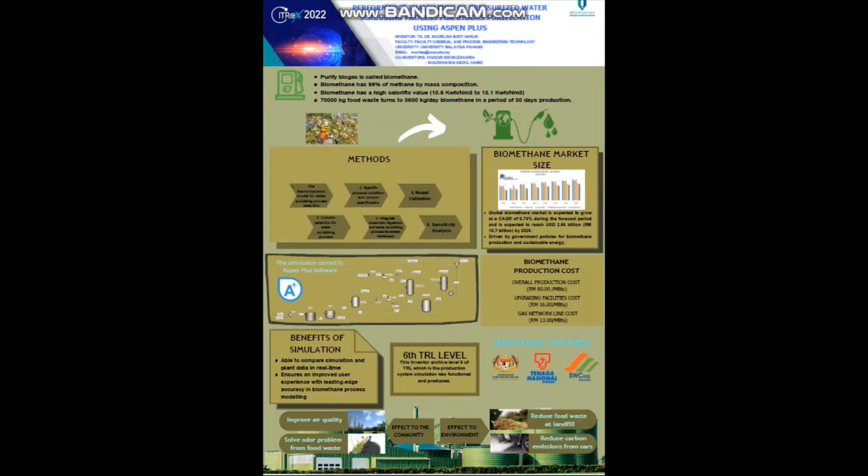Our research title is Performance Evaluation of Pressurized Water Scrubbing Process for Biogas Purification using Aspen Plus software. Our inventor is TS Dr. Noorlisa binti Harun, and I, Kaidi bin Zakaria, and my friend Syazwan bin Abdul Hamid, are co-inventors in our team. We'll continue our presentation by presenting our research on Performance Evaluation of Pressurized Water Scrubbing Process for Biogas Purification using Aspen Plus.

For the introduction, biomethane is biogas in which carbon dioxide, hydrogen sulfide, and water have been removed. Biogas is a renewable energy source that can be used to substitute fossil fuel in power and heat generation. Biogas is produced by anaerobic digestion, a process by which organic matter such as animal or food waste is broken down to produce biogas. Biogas needs to be cleaned first before being used for fuel, heat, and electricity.

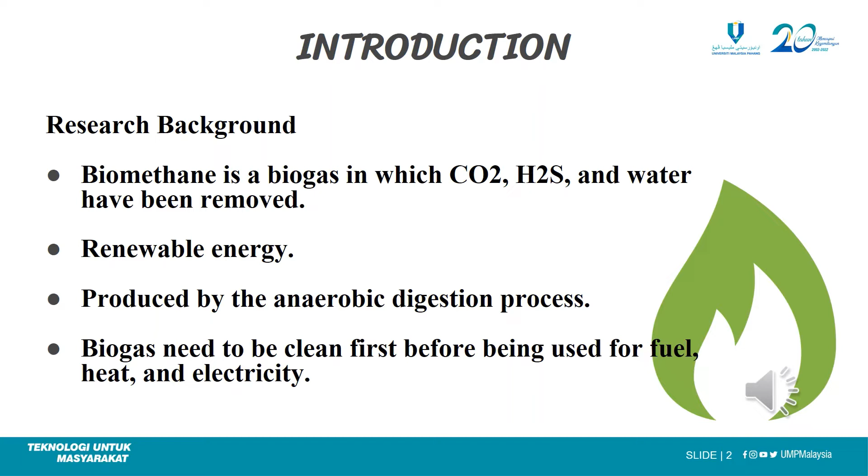There are several processes to purify biogas such as pressurized water scrubbing, pressure swing adsorption, physical absorption, chemical absorption, membrane separation, and cryogenic separation. According to the figure, water scrubbing is the most common process used to purify biogas. This is because it is easy, low cost, and has low toxicity compared to other processes.

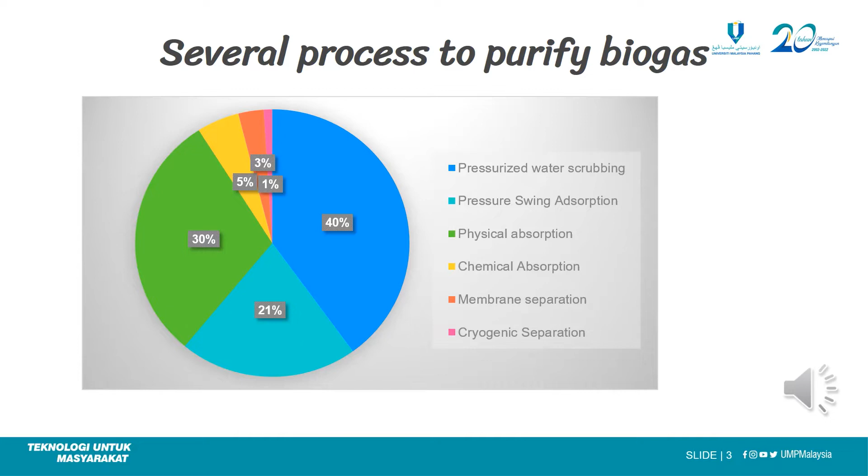For the problem statement, the main problem is high water demand. This is because water is recycled continuously, so evaporated water must be replaced. In order to increase the absorption ability in the column, high water demand is required.

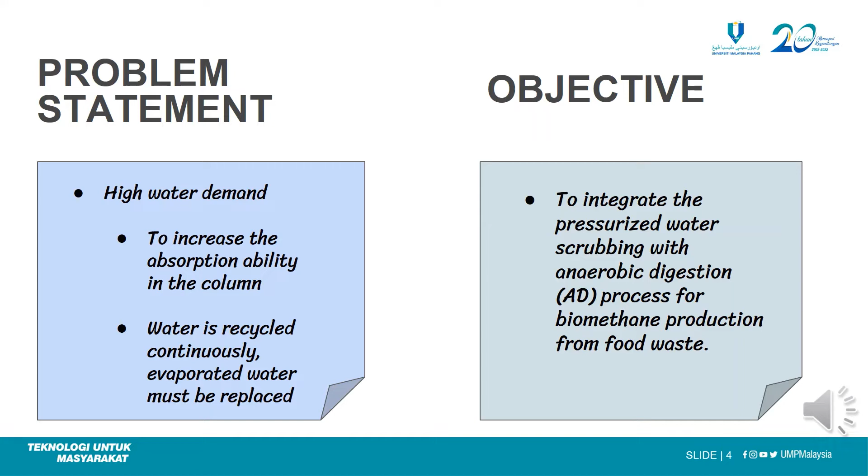The main objective is to integrate the pressurized water scrubbing with anaerobic digestion process for biomethane production from food waste. For the scope of study, firstly, model development of pressurized water scrubbing for biomethane production using Aspen Plus software.

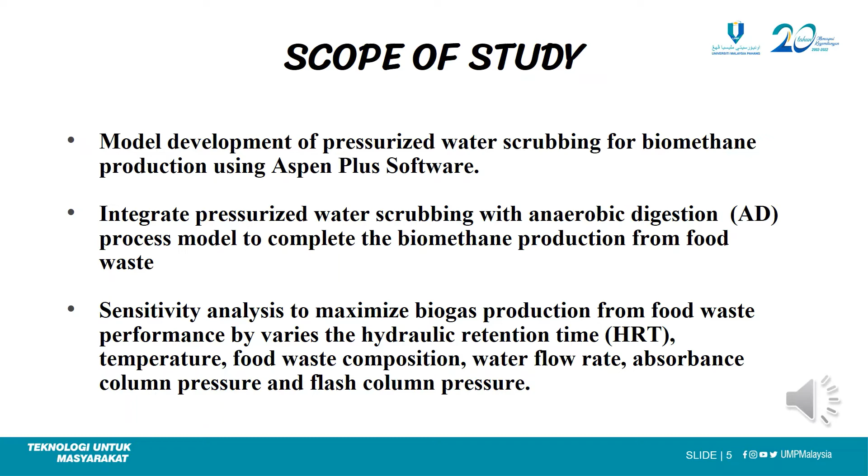Second, integrate pressurized water scrubbing with anaerobic digestion process to complete the biomethane production from food waste. Third, perform a sensitivity analysis to maximize biogas production from food waste by varying the hydraulic retention time, temperature, food waste composition, water flow rate, absorber column pressure, and flash column pressure.

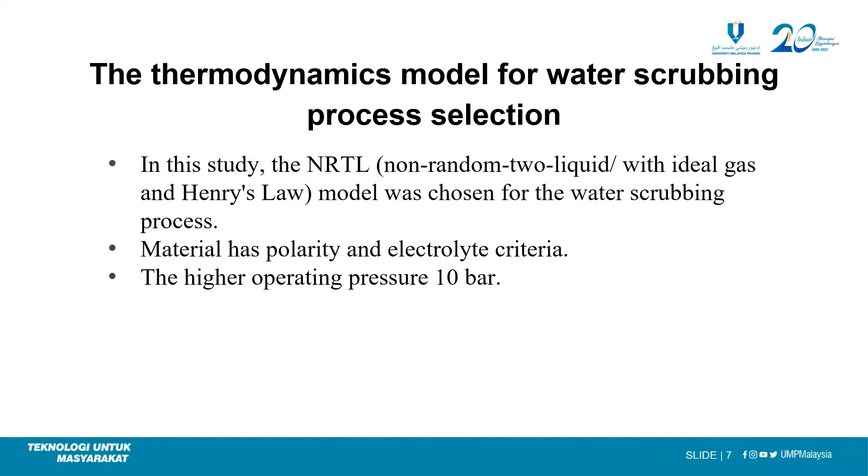I will present our study methodology. First, the thermodynamic model for water scrubbing process selection. In this study, the NRTL, non-random two liquid, with ideal gas and Henry's Law model was chosen for the water scrubbing process. Next, column selection for the water scrubbing process: RadFrac without reboiler and condenser was selected as the absorber column.

RadFrac with reboiler was selected as the stripper column, and Flash was selected as the flash column.

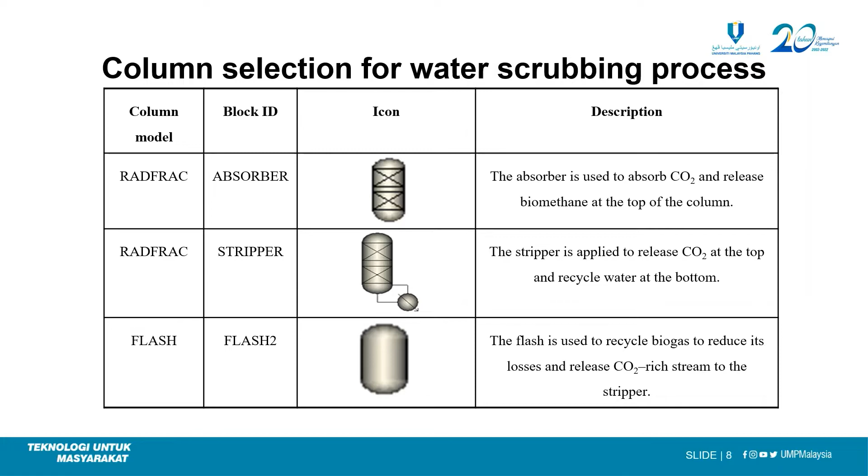Next, specific process conditions and column specifications. For the calculation type, rate-based calculation was used for the absorber, whereas equilibrium calculation type was used for the stripper. The absorber column has 18 stages, whereas the stripper has 7 stages.

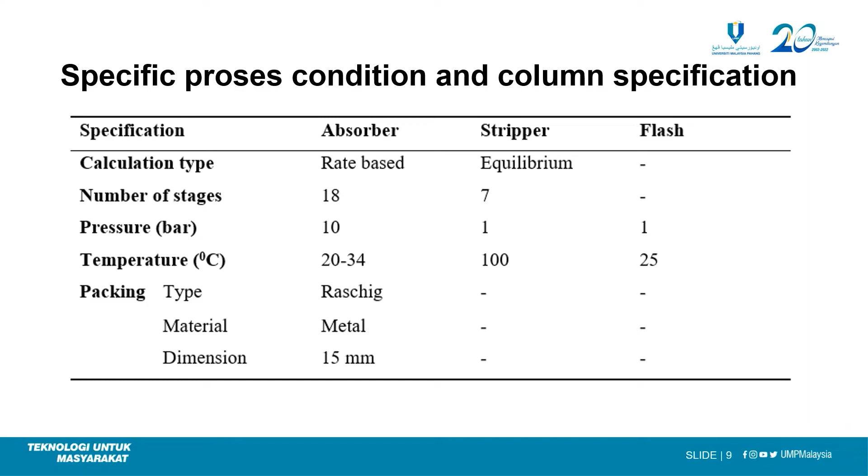The absorber column will operate at 10 bar pressure and 20 to 34 degrees Celsius. The stripper column will operate at 1 bar and 100 degrees Celsius, and the flash column will operate at 1 bar and 25 degrees Celsius. In the absorber column, the stages will be filled with metal Raschig packing with a dimension of 15 mm.

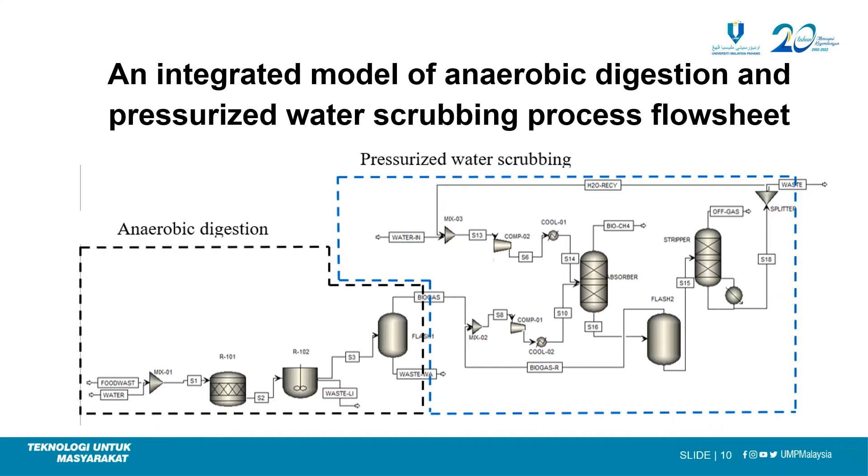Next, an integrated model of anaerobic digestion and pressurized water scrubbing process flowsheet. This is the anaerobic digestion region and this is the pressurized water scrubbing region. Process description for the integrated flowsheet.

First, the food waste and water will enter the process at a ratio of 10 to 1. The food waste and water mix in the stoichiometric reactor to undergo hydrolysis, then continue degradation reaction in the CSTR to produce biogas. Biogas from the CSTR enters Flash 1 to remove some water.

After some water was removed from the biogas, the biogas entered the purification process. The biogas went to the absorber under a pressure of 10 bar. Pressurized water was used in the absorber to dissolve CO2 from the biogas. Biomethane will come out at the top of the absorber as product.

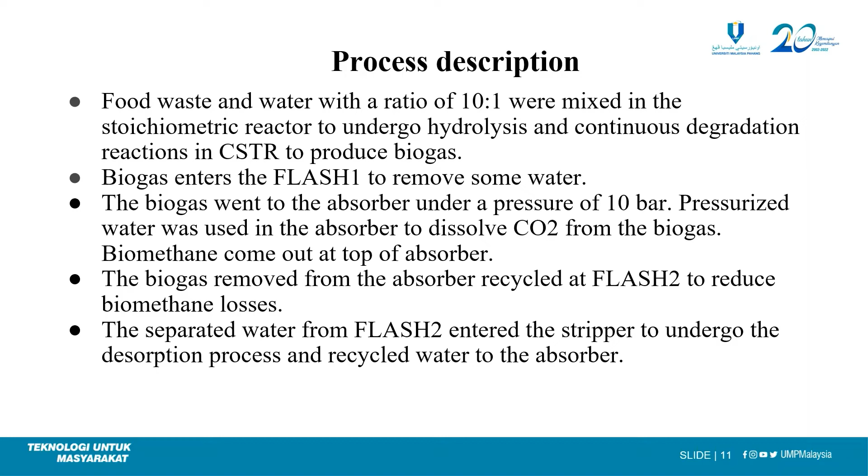Next, the biogas removed from the absorber will recycle back at Flash 2 to reduce biomethane loss, and the separated water from Flash 2 goes into the stripper column to undergo the desorption process, recycling water back to the absorber and releasing free CO2 gas to the atmosphere.

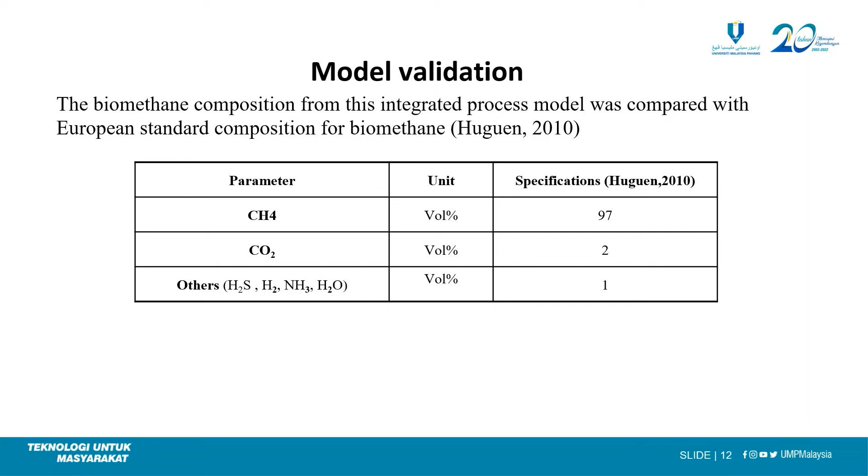Next, the result from this simulation is valid with European standard composition for biomethane. Sensitivity analysis is carried out by studying the effect of hydraulic retention time, the effect of temperature, the impact of absorber column pressure, the impact of food waste composition, the effect of water flow rate, and the effect of flash column pressure on biomethane production.

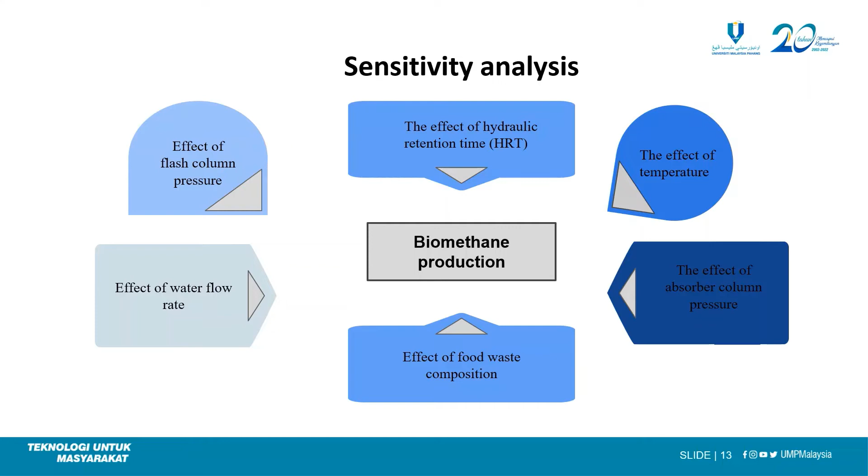Next, we go to the result of the simulation. From 70,000 kg of waste mixed with 7,000 kg of water, we can produce 9,595 kg per day of biogas that has 64% methane and 30% carbon dioxide by volume. The biogas enters the purification process to produce 3,467 kg per day of biomethane, which is 98% pure by percentage methane.

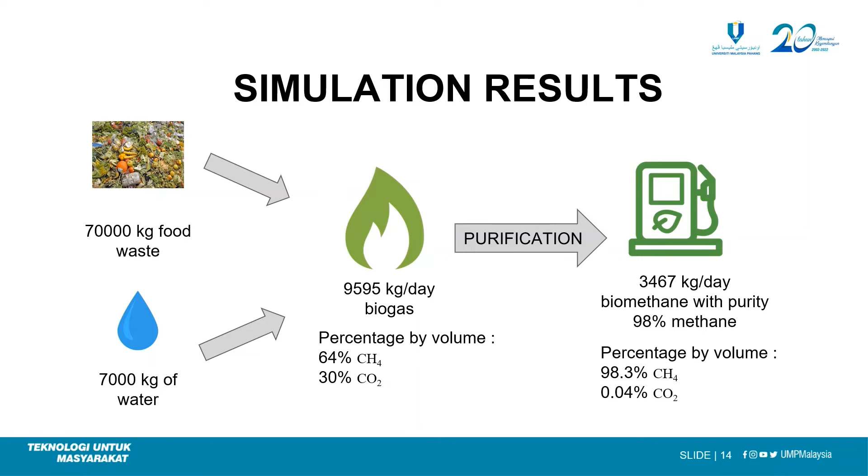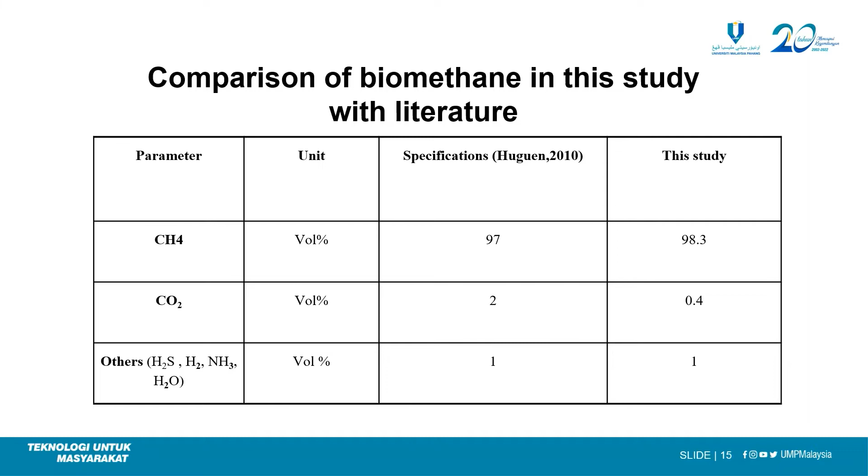The biomethane in this simulation has 98.3% methane and 0.04% carbon dioxide by volume. Next, comparison of biomethane in this study with literature. In this study, the methane has the highest volume compared to the literature and has the lowest carbon dioxide volume percentage compared to literature.

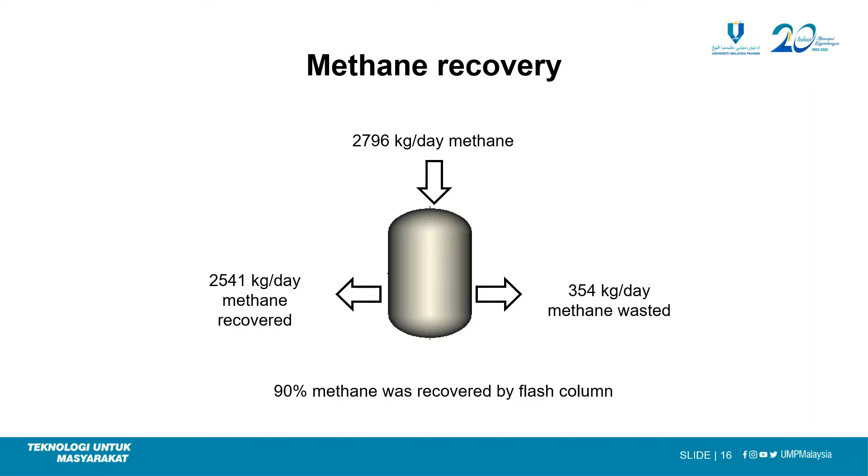After that, methane recovery. To maximize the biomethane process, the methane that was scrubbed in the absorber column will be recovered back at the flash column. 2,796 kg per day of methane goes from the absorber column into the flash column. The flash column will recover 2,541 kg per day of methane, and 354 kg per day of methane was wasted.

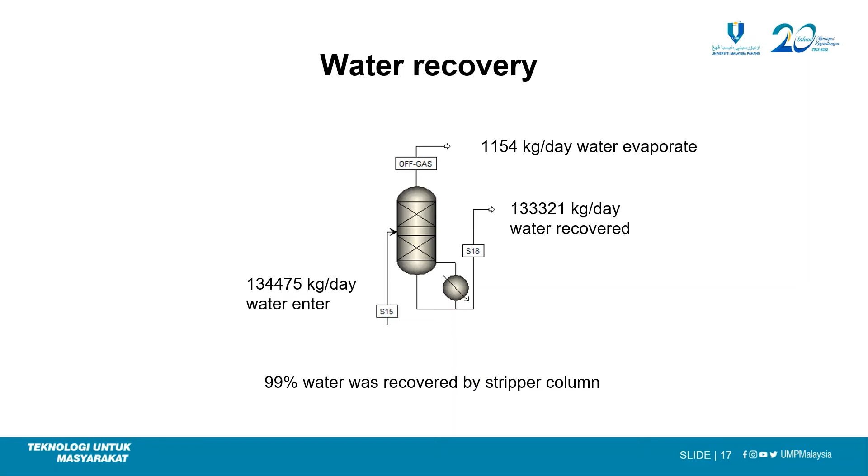Next, water recovery. To reduce the water usage in the pressurized water scrubbing process, the water was recovered at the stripper column. 134,475 kg per day of water from the absorber column will enter the stripper column. The stripper column recovered 133,321 kg per day of water, and 1,154 kg of water was evaporated and released to the atmosphere.

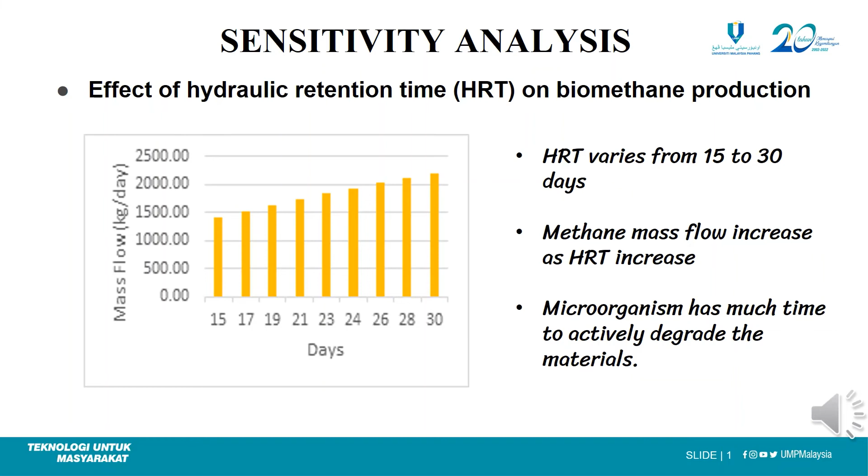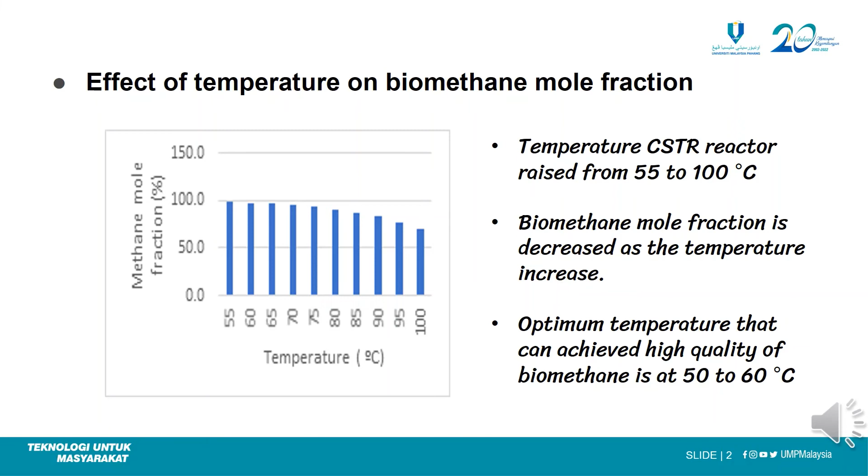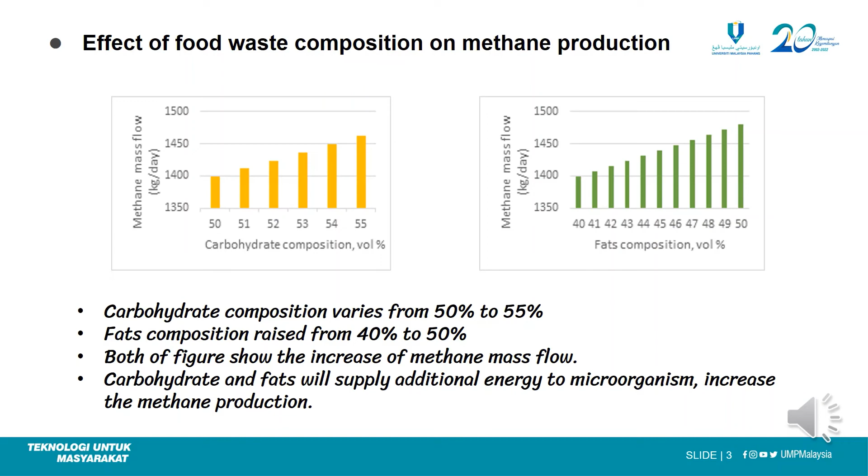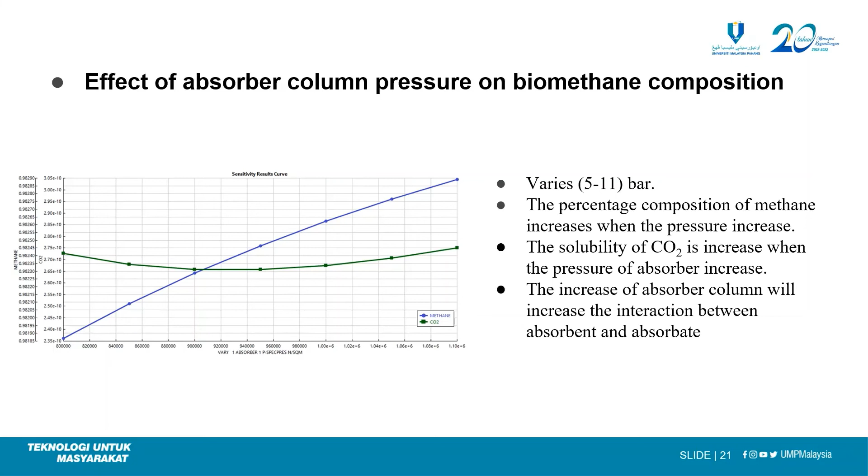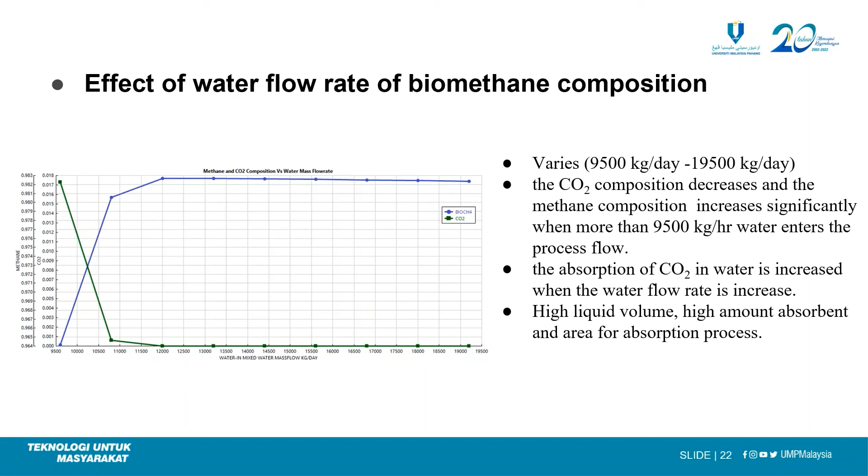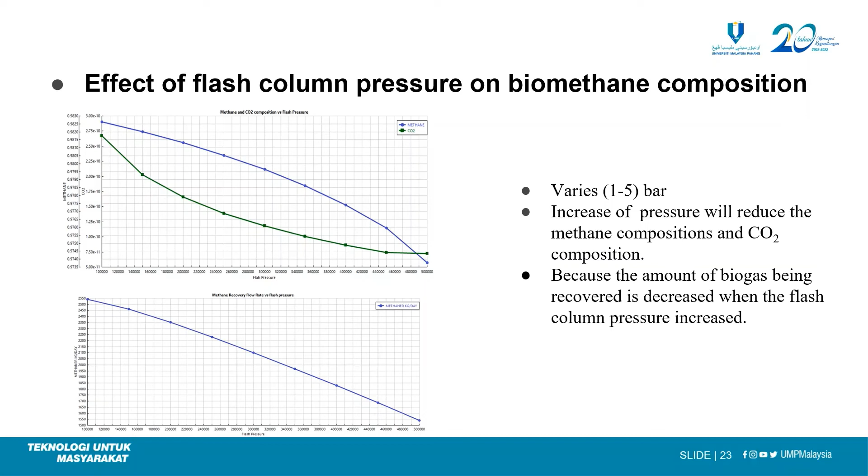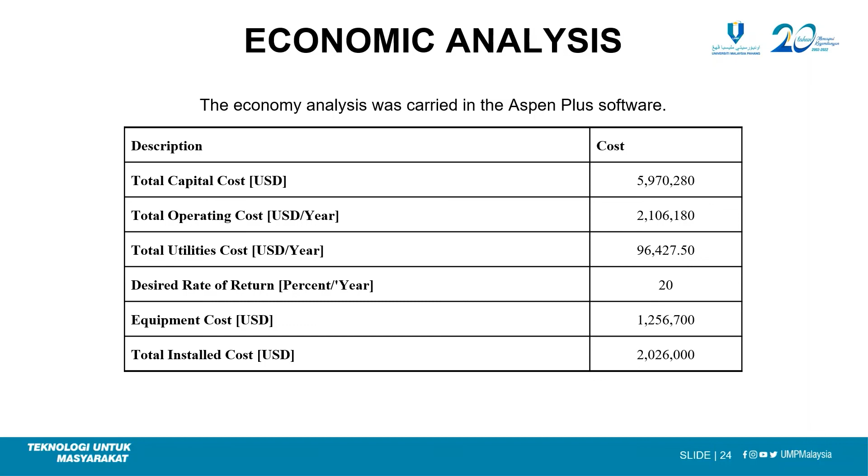Next, economic analysis. The economic analysis for this simulation was also carried out in the Aspen Plus software. Total capital cost to build this biomethane plant is 5,970,280 USD. To operate this biomethane plant, 2,106,180 USD per year is needed.

As a conclusion, the integrated anaerobic digestion and pressurized water scrubbing process was developed. This study produced 3,467 kg per day of biomethane. This study also produced 98% biomethane purity and 99.7% carbon dioxide removal. So this study meets the criteria of biogas upgrading.

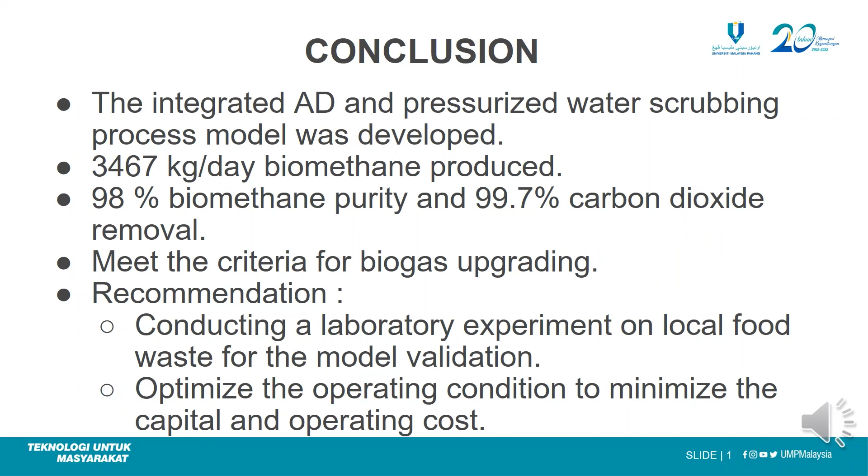For the recommendation, conducting a laboratory experiment on local food waste for model validation and optimizing the operating conditions to minimize the capital and operating cost. That's all from us. Thank you.